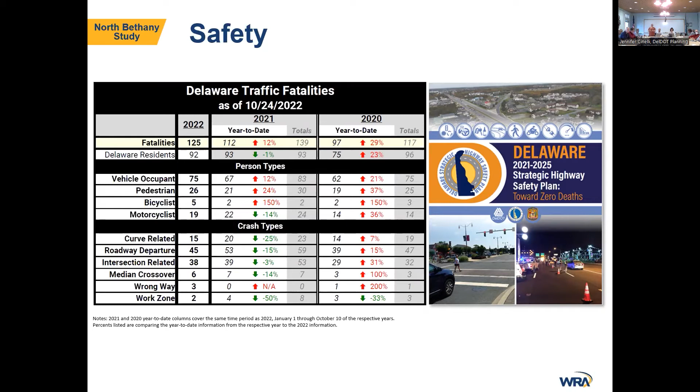I'm not sure if anybody is familiar with road diets, but it's basically shrinking the roadway down and making it more multimodal versus having it be kind of a high-speed highway.

So again, once we're through the data, we're going to talk about some strategies that we think are going to work, which will be short-term stuff we can do right away, mid-term stuff that's going to take probably about 5 to 8 years, and then the longer-term stuff is stuff that we put into our capital transportation program.

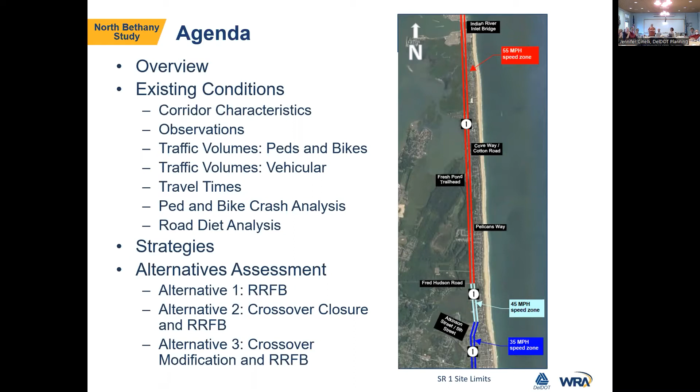And so this started, it really started before Rep. Gray requested it. He did get involved to get this study off the ground for sure. But it actually started with Mr. Seth Hammond reaching out to myself and Linda Osiecki, our pedestrian coordinator at DelDOT, during COVID.

When everyone kind of stayed home, but then decided they needed fresh air. And so there was more bikes and more peds and more everybody at the beach.

So for the past 2 years. Slow down a little bit. Okay, folks online are having a hard time hearing the audio, sorry.

So it's been about 2 years that we've been working with staff in assessing the area, trying to figure out where the focus of this study needed to be. But then I was able to get this part of the study funded.

And so this summer we had our consultant team go out and start the assessment, doing counts on the ground, which you'll be able to see the data for in just a few minutes.

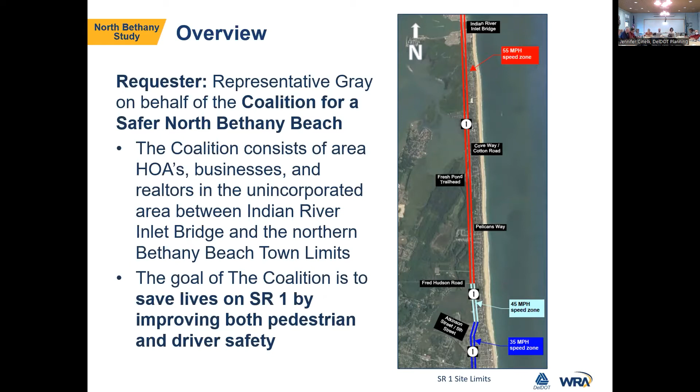Thank you, Jen. As Jen said, my name is Leah. I'm a planner with WRA. Kyle, he's the engineer and I'm the planner. So I'm kind of the big picture thinker and he's the data guy. We're excited to be here tonight and share what we learned.

So we did get out in the field, and one of our goals for this is obviously the way people walking and biking travel the corridor is much different in the peak season than the off season. Although we do understand that at this point there are people walking and biking throughout the year. Increasingly, more of you are living down here full time and still want to get out and move. So we met out at the end of July, and fortunately we were able to get some people on the ground and making some counts.

So at that kickoff meeting, we heard from Seth representing the coalition and a number of your local elected officials. Thank you for joining us. Some concerns: obviously, speeding along the corridor, the fact that we don't have any marked pedestrian crossings out there right now. Also, pulling out of some of the neighborhoods, people maybe are looking left for cars, but aren't looking right for people walking and biking. Some overgrown vegetation issues, not too much of that, and just general things that I'm sure you've all observed.

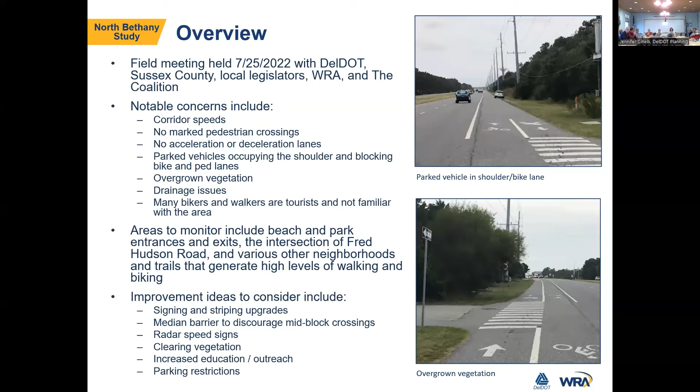So we collected feedback on where we should post up and count, and you'll hear more about that from Kyle momentarily. And we had some preliminary ideas to consider as we were out there making those observations, signing and striping upgrades, and some other techniques. So as far as questions go, we are going to get through the existing conditions and then pause for questions. And then we'll get into our strategies and some of our preliminary recommendations, and we'll pause again. So we'll be ready for you in a minute.

So the corridor we really ended up focusing on was Route 1, between the bridge you see right out the window, down to the town limits of Bethany Beach, so around 5th Street, Atkinson Street. So it's about a 4.4 mile stretch. As you know, 4 lanes, divided highway, and a unique treatment on the shoulders with the bike markings and pedestrian markings. And as I'm sure most of you know, bikes by law are required to travel with traffic, and pedestrians by law are required to travel into traffic, and that's for safety reasons and for expectations of users.

Now, I'm sure you all observe also, oftentimes people are not following those conventions because it's probably a little scarier to cross the street than it is to stay on the side, especially if your origins and destinations are on the same side. So that's one thing we're very aware of and is a concern. We also have a couple of bus stops out there right now, and if you get off the bus, you're kind of stuck on that side of the road and you have to cross. So when we look at crossing locations, we want to consider transit as well as all of our U-turn locations and private driveways.

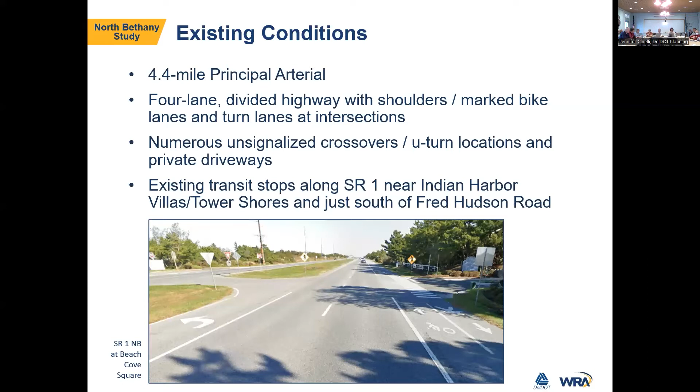So right now, the speed limit is posted 55 miles per hour north of Fred Hudson Road, and that decreases south of Fred Hudson to 45 miles per hour. The annual traffic volumes out there are a little north of 32,000 vehicles daily.

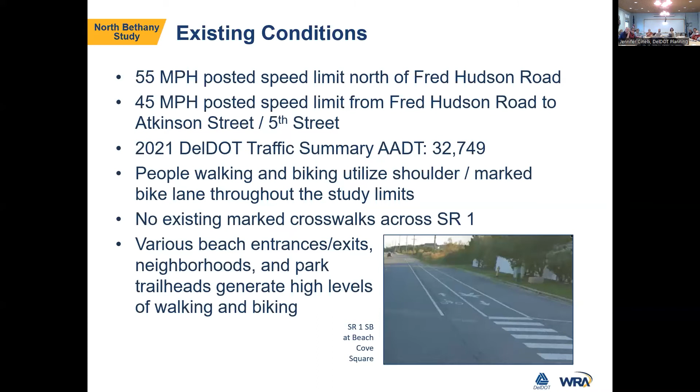And I think everything else we touched on already with the no marked crosswalks and all of that. And I'm going to turn it over to Kyle.

Thanks, Leah. So after we met in the field with Seth, we actually took a ride in the car and looked at hot spots along the corridor, areas of concern. So we identified 7 sites. We sent the team out the next weekend on Saturday, July 30th. You might not remember that day, but it was a high of 84, no humidity. It's like a perfect day.

I know Seth had brought up some concerns that there's potential that Saturdays aren't as busy because of turnover on rentals. But we did look at the trail volume. There's a traffic counter at the Fresh Pond Trailhead, and that showed really no difference between Saturday and Sunday volume. Sunday is slightly higher, but when we were out there, you'll see from the data, there's plenty of pedestrian and bicycle activity. We had to go out the following weekend too to grab the last site.

So we looked at longitudinal pedestrian and bicycle volumes, people using the shoulders of Route 1. We counted people crossing Route 1. At the Fresh Pond Trailhead, we did our own count of traffic in and out of that, and then just general observations while we were out there, anything to note, origin destinations, travel patterns, conflicts. I'm gonna get the slide there.

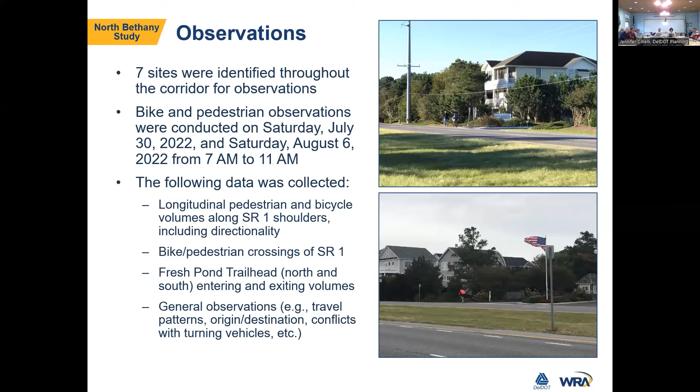So this is our longitudinal pedestrian bicyclist volumes. These are hourly volumes, the peak hour at each site. And so you can see here the sites that we chose. So for example, the 106 bikes at Cotton Road and Cove Way, that's a total of both directions, both shoulders of Route 1. But you guys can see just from the numbers, there's a serious number of bicyclists and pedestrians out here. Yeah, over 100 bikes an hour, 40 to 50 to 60.

Up at Cedell Drive, you have 82 pedestrians an hour. And one of the things we noticed was a lot of the pedestrians use the northbound shoulder, regardless of what direction they're walking, because it's shaded. I think it's just generally people want to be on that side.

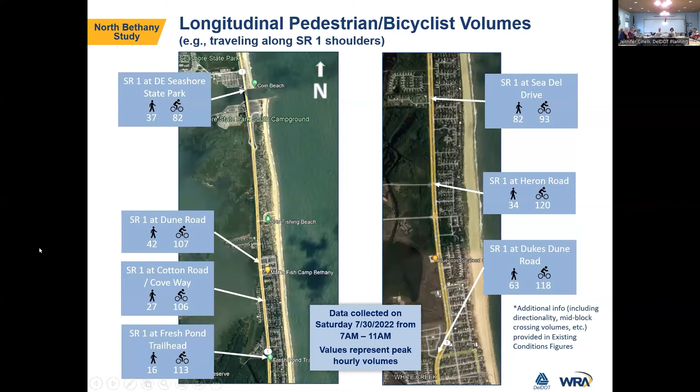And then we go to the crossing volumes, next slide. So these are pedestrians crossing Route 1. You can see it varies throughout the corridor, but at the Fresh Pond Trailhead, we had 51 people crossing in just a single hour. So the numbers are pretty staggering. Even throughout the rest of the corridor, you have 20, 21. So obviously there's people trying to get back and forth.

I know some of these communities have deeded access from one side of Route 1 to the other. So it was apparent, and the trailhead is clearly the highest volume, and that's going to be the place where we start, which you'll see where we're going to start with our improvements.

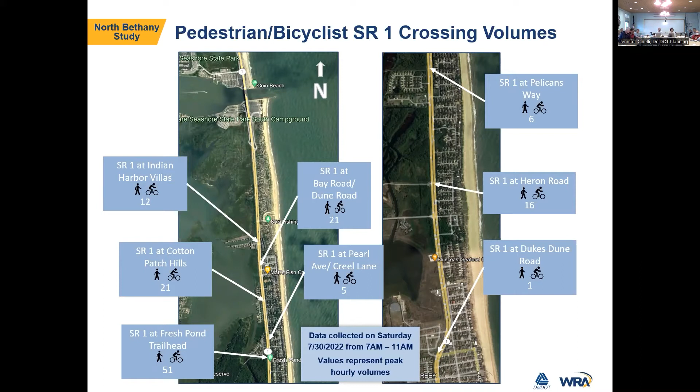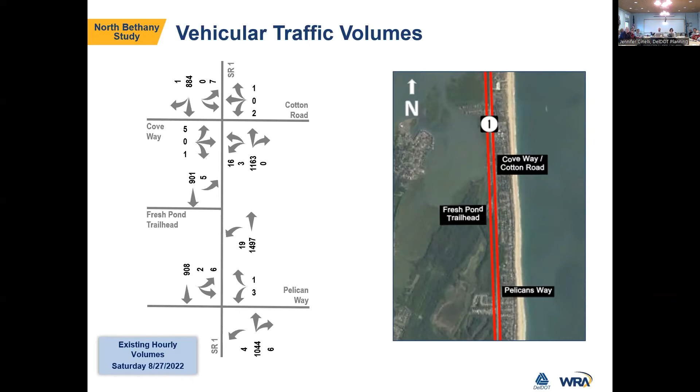And then we went out and collected some spot counts just to get an idea of what the turning movement volumes look like at some of these crossovers. So this is during Saturday, August 27th, middle of the day. So you can see hourly volumes northbound on Route 1, you got 1,200 up to 1,500 vehicles an hour. Southbound is a little under 900. But you can see the side street traffic and the U-turns, they're pretty negligible volumes there. That just gives you an idea of hourly summer volumes.

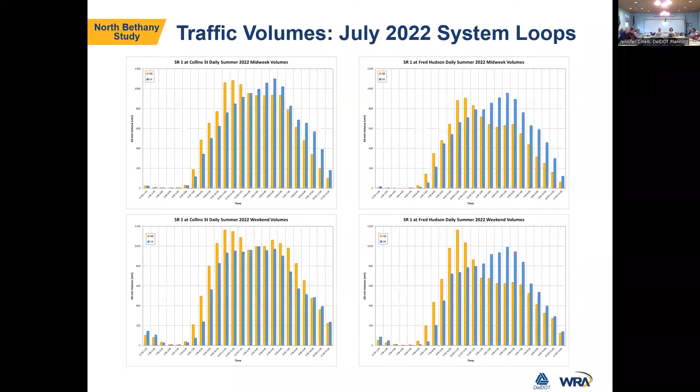And then you see the same trends at Fred Hudson Road. They're also around 800, 900 to 1,000 vehicles an hour in the peak direction, and that's directionally, so in each direction. And all this again is available online if you guys want to look. Yeah, when you get the PDF, you'll be able to get into the weeds and read the numbers. Yeah, zoom in a little more.

We also looked at travel times along the corridor. So we used April data to look at a typical AM and PM peak hour in the weekday. And then we looked at July Saturday data. So from Dewey to the Inlet Bridge, you can see during the week in April, it's about 5.5 minute travel times, and then tack about 2 more minutes on for the summer. Similarly, down below the bridge to Bethany, you're looking at 4 minutes roughly in the off season, and then add another minute to that. So that's really just due to the increased volumes.

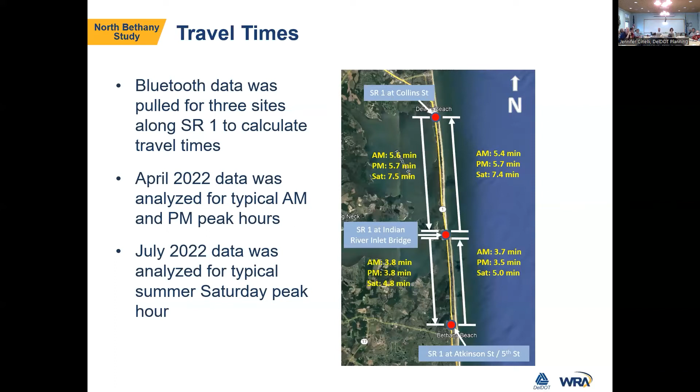Speed study: DelDOT traffic actually collected a speed study out here recently. We used portable tubes to collect speed data. You can see based on the results here, locations A, B, and C are where it's posted 55 miles an hour. Your average speeds were generally in that range, a little slower at site C when you're coming out of that 45 mile an hour zone north of Fred Hudson. 85th percentile speeds are nearly 10 miles over the speed limit.

And then site D, which is in that 45 mile an hour zone, or I'm sorry, that's actually south. That's in the 35 mile an hour zone in the town of Bethany. You can see it's a little better there, likely due to the enforcement that's pretty consistent there in Bethany.

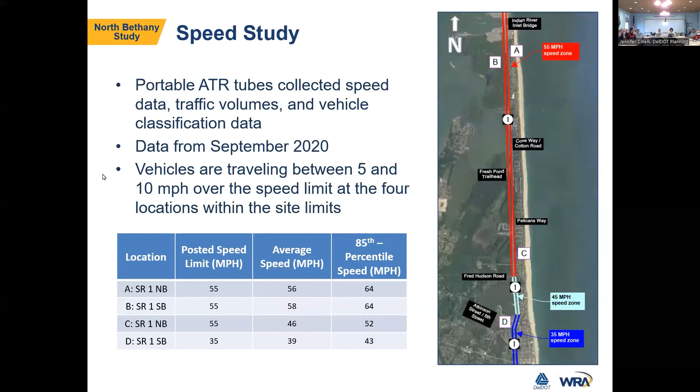And then we look at pedestrian and bicycle crash history. We only focused on ped and bike crashes, with that being the focus of the study. Over the 10-year period from August 2012 till this August, there were 12 total pedestrian and bicycle crashes, one of which was a fatality, unfortunately.

Looking at those 12 crashes, 6 of those involved vehicles turning out of the neighborhood westbound from the beach side, turning right, and they'd hit a bicyclist or a pedestrian coming the wrong way. Well, the pedestrian is going the right way. That was only one incident, but 5 incidents of the bicyclist coming the wrong way. You're pulling out of your driveway and you're just looking left for traffic, and you don't see that bicyclist coming. So that was the biggest trend we saw.

We had 3 crashes involving bicyclists on the shoulder that ran into a parked car. Seems kind of silly, but that's an actual concern, people parking or broken down vehicles sitting on that shoulder. There's nowhere to go if you're a bicyclist. And if you're in that predicament where, do I go in the travel lane or do I hit this car? You're probably just gonna hit the parked car. Take your chances there.

2 crashes involved vehicles entering the travel lane. They're northbound. One of them was by the trailhead, and that was one of the fatalities. Not sure the circumstances behind those. And then there was 1 crash involving a vehicle entering the right turn lane as a bicyclist going the same direction was in there. I'm sure you guys have seen that conflict. That's actually pretty common in Dewey. We found a lot of those type of crashes.

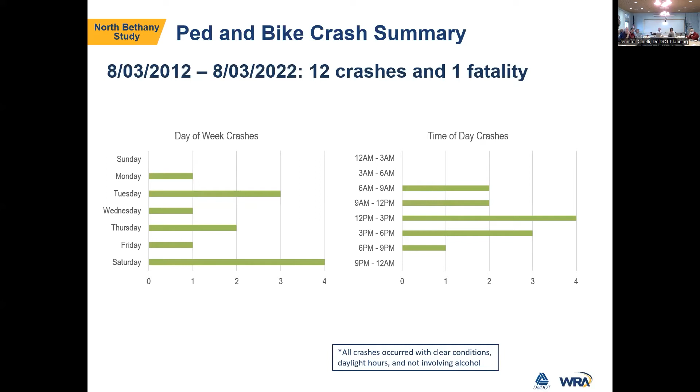Looking at day of week and time of day, you can see Saturday's our biggest day. Surprisingly, there were none on Sunday, but pretty well distributed throughout the week. And then time of day, all crashes occurred during daylight hours. 12 to 3 was our biggest cluster there, but it's not really a nighttime issue since people aren't really using the facilities at night. On to the next slide there, Leah.

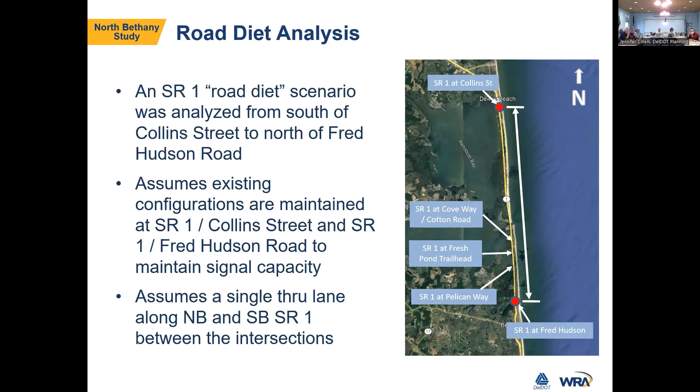But as you'll see, if you go to the next slide, Leah, we looked at what would happen if we did do that. The top is some of those 3 crossovers I showed you where we collected the turning movement volumes, and westbound coming out of your neighborhoods, you're looking at up to 1.5 minutes extra of delay. The U-turns aren't as affected, so it would obviously be an inconvenience for local residents trying to leave their homes. But the more telling data is below.

We ran highway capacity analysis on 2-lane roadways with no passing zones, and you see your time spent following another car is basically 100% of the time. You're never in a free flow situation. Your average travel speed's down around 35, 40 miles an hour, and your level of service, which is basically a scale, A being no delay and F being congestion, it would just be congested.

Not to mention the public backlash that DelDOT will get from doing such a thing. So we did our due diligence, but we're not recommending going down to 1 lane.

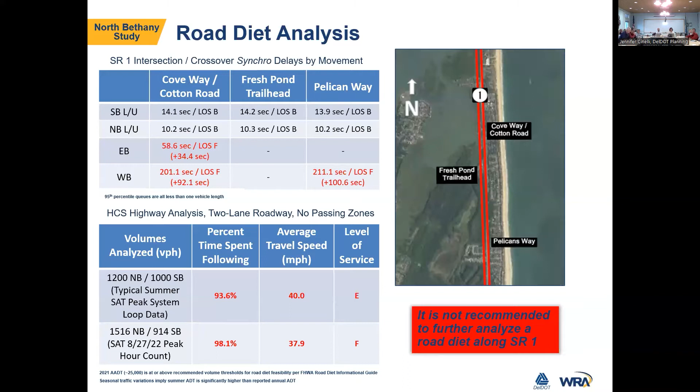They're not recommendations yet, let me say that. They are strategies right now, because we are here today to hear from you as to what we do want to advance and call a firm recommendation coming out of this effort.

So here we go. Firstly, with our strategies, when DelDOT does these studies, what we don't want is this document to go sit on a shelf somewhere and get dust on it, which I think we've all been familiar with. That's not what we want.

So pretty much everything coming out of this has to fit into one of three categories.

And those essentially are short, medium, and long range improvements. Short range improvements are usually within 1 to 3 years, sometimes right away, depending on how basic they are. Generally, those are improvements that can be handled by DelDOT's traffic group as part of paving or striping.

And also the bridge group, and they go into the DelDOT CTP, or Capital Transportation Program, but on the operations side of things.

Now, the CTP is also capital improvements, so those are bigger changes. And those bigger changes, as you all know, take more time and they take more money, and they have to go into the process. The 4 to 6 year horizon is probably when a project would start their design phase.

So that's not even barrels on the ground. We're talking just starting off with drawing and drafting kind of what the concepts are gonna look like.

And then long range, and that's where Jen, as a planner for Sussex County, is also in charge of keeping track of all the big picture, long-term recommendations of getting things done and making sure that stays on board.

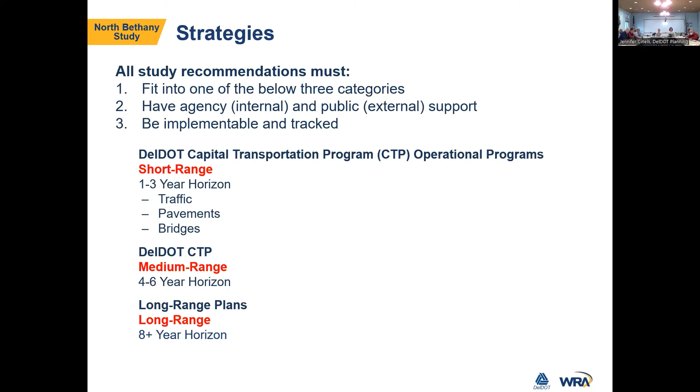So just wanted to kind of have that caveat, and we're gonna walk through which of our strategies fit into each of those categories. This is not gonna be an overnight solution, but we do have some ideas.

So some short range strategies we could do very quickly: we could standardize and improve signage at the exits to private residential developments. Again, most of those are not in DelDOT's control.

You see an example there on the screen of a 'look again for peds and bikes crossing' sign. So that's something we could coordinate potentially.

So I don't want everybody to think, oh, they're already giving us something to do as an HOA. Please understand, because you all have private developments with private roads, it is gonna be collaborative. We're gonna take care of the things we can take care of on Route 1.

You'll have to take care of some of the things along your roadsides, and working with our legislators and councilmen to maybe get some assistance with that. And we're here as a resource always. So please don't feel like we're pushing everything off to anybody. It's gonna continue to be a collaborative experience.

Thank you, Jen. And the other really quick and easy thing is evaluating sight distance. So if you're coming out of a development and you have to pull forward into the shoulder to see both ways, that's a problem, right?

If you have to pull into the shoulder to tell if a bike's coming, we're already at a conflict point. So we look to all of you if there are any places where there's overgrown trees or vegetation.

Depending again on where that's located, if it's within DelDOT's right of way, the DelDOT crews can handle it. If it's on private property, it might be working with your HOA to make sure that's trimmed back. So those are some things we could tackle immediately.

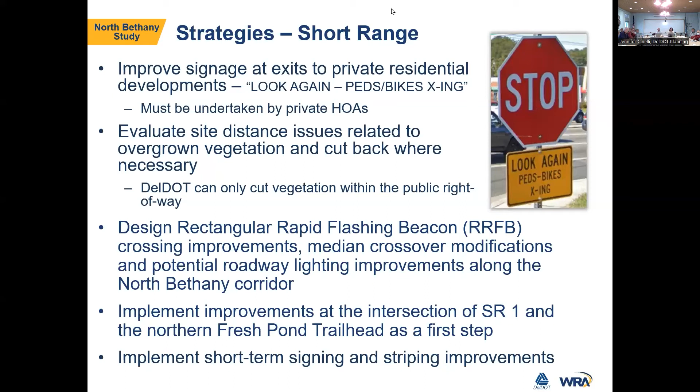That's very helpful, and again, we'll be getting into more slides of what these crossings would actually look like, so bear with us for some more greater level of detail there.

So here's an example of an RRFB - this one's at Wellington Parkway in Bethany Beach. Here's an example of where right now people often are crossing, where there's an existing place you can do a U-turn, through a median. There's a bunch of different configurations we'll show momentarily, but in case anyone had any question about what these RRFB things are - for some reason us transportation professionals love our acronyms. What I like to point out too is the refuge area that exists now for pedestrians and bikes, because sometimes when you're sitting inside a crossover that's paved for vehicles, that's very stress inducing. So this calms it down a little bit, makes you stop and pause and make sure it's safe to cross once the beacons start going off.

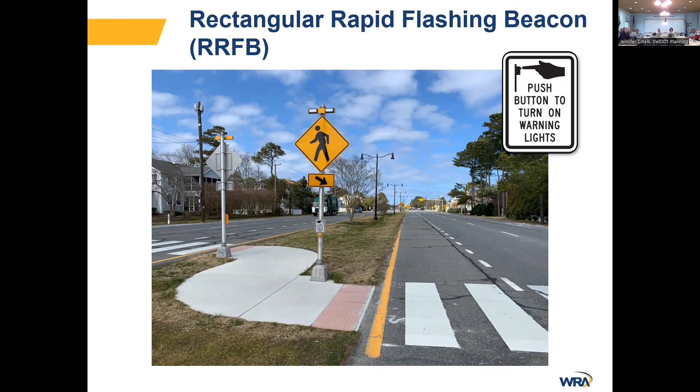So medium range, we have already talked to the DelDOT paving group, and right now this segment of road is not on their schedule.

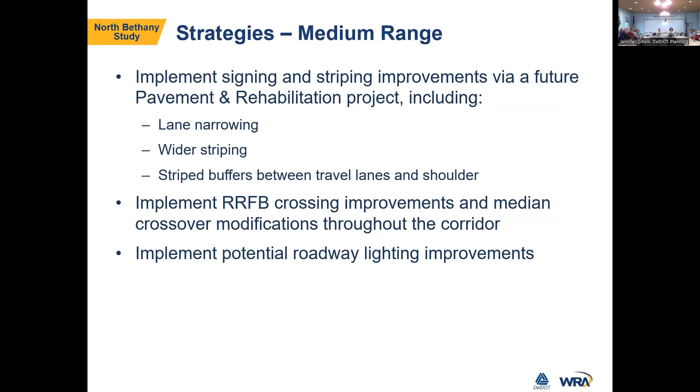They usually do a schedule like 2 to 3 years out, but there's interest in maybe moving that forward. One thing that could be done is narrowing the lanes down. Right now, the actual travel lanes cars are moving on are 12 feet wide, and increasingly throughout the state we're narrowing to 11 feet wide, incorporating wider striping. We could also stripe a buffer area between the edge of the vehicle lane and the shoulder, and in conjunction with pavement rehab we could implement those crossing improvements Kyle was just discussing, as well as lighting improvements.

This is what's out there right now. We have a pretty wide grass median, 34 feet for those who can't quite see the screen, with 12-foot wide lanes and an 11-foot shoulder. Even if we just taper all those lanes down to 11 feet, we gain enough space to stripe a nice wide 3-foot barrier between the edge of the drive lane and where people are walking and biking, without losing any width for the people walking and biking. So you still have 10 full feet.

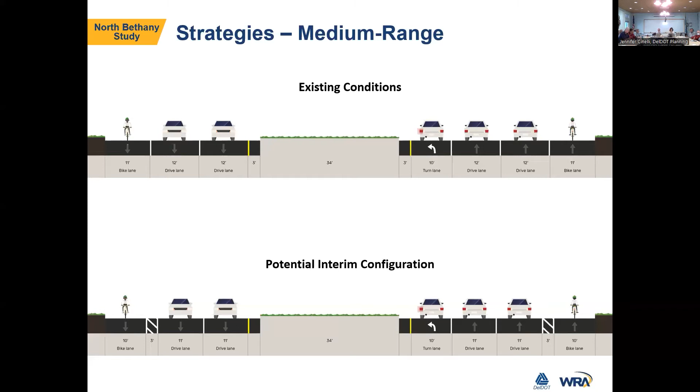This is kind of an interim configuration we could look at that would give you a little more space. Again, no physical barrier between where you're walking and biking and the cars, but a little bit more space. Those narrower lanes could also slow cars down a little bit in conjunction with the crossing improvements. When we look at measures that start causing people to slow down, it's things at the edge of the roadway. More vegetation in the median is another strategy we talked about. Up here on the north side of the bridge, it's kind of like a wildflower meadow in the median, and once you get south of the bridge, it's just close cut grass. That can also help slow people down, to have some more interest going on there. So that's a potential interim improvement.

Looking at long range, we have another section you can look at momentarily. Just want to note, any of these improvements have to be coordinated with Sussex County. In other parts of the state, they have planning organizations that help this process, but in Sussex we have Jen. The county does have to be on board in order to recommend a project to go into that capital transportation program. So they are abreast of this, they've been kept up to date on what we're up to, and we'll be seeing this presentation.

Any bigger improvements are of course going to have to look at stormwater management. We know there's flooding issues down here. DelDOT has a new resiliency section, and we're going to want to make sure we're working hand in hand with them.

Another thing we've talked about, if you've traveled Route 1 further north, you've noticed those cable median barriers that are going in. That is because, unfortunately, the safety data Jen presented earlier shows we're seeing a lot of cars crossing over grassy medians and having head-on collisions. That is happening, and it's something we're very concerned about statewide. Do those median barriers look very pretty? No, they do not. But were we to do a median barrier with some wild native plantings to mask it, that could potentially both be a safety measure and an aesthetic improvement. We're excited to hear from you on that.

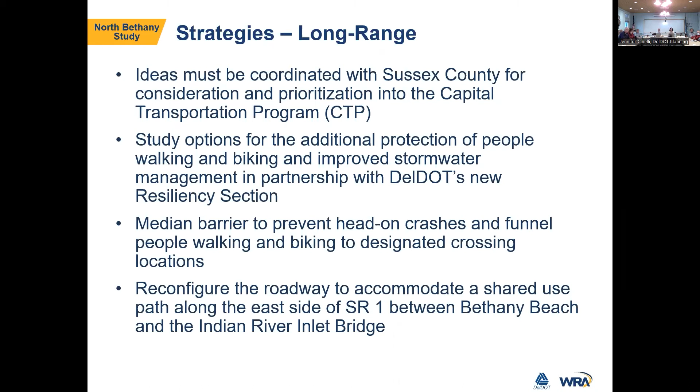And the most exciting, in my humble opinion, is potentially reconfiguring that roadway to accommodate a truly separate shared use path along the east side of Route 1 between Bethany and Indian River Inlet Bridge. Fortunately, the right of way is so wide. If you look at the screen again, there's our existing conditions. If we make our grassy median a little bit more narrow and shift our lanes over, we'd have plenty of room for a nice wide 14-foot path—generally we go with 10 feet for a shared use path, but increasingly in coastal communities these facilities are very popular and 10 feet is not wide enough when it's crowded. So looking at a nice wide 14-foot pathway for people walking and biking, that would still retain shoulders for avid cyclists who like going a little faster—you'd still have your shoulders to ride.

But if you're out with your family or some people who just want to take a leisurely ride, you could have that option. Now that's just an example. And again, any of these improvements would have to coordinate with stormwater management because we're increasing the impervious surface, so drainage might be more of an issue, and this is a long-term goal.

These things are not cheap. They require a lot of planning and a lot of design. But given the volumes of people walking and biking out here, we definitely think it would be well used. So again, this is something that will be talked about with the county and then eventually submitted for a CTP project. The study for that type of configuration would be much larger than what we've done so far. So I have some more details on the crossings and then we can open it up for questions.

So I'm going to turn it back over to... Oh, and any of the longer range projects are also going to be out for public workshops multiple times before anything is ever done. So I don't want anybody to think this is the first time you're going to see it and then boom, it's coming into any plan. That's not how it works. We are required, and I love doing public workshops. So trust me, you will see me many, many times before any of the major projects come online.

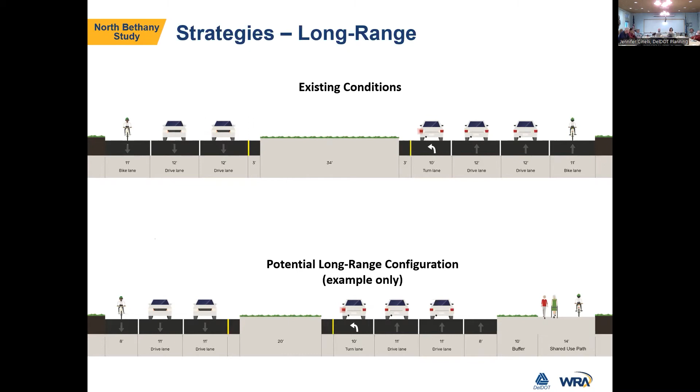So I'm going to turn it back over to Kyle, who's going to share some detail on what those crossings could look like, and then we'll break for questions and comments.

Yep. So we looked again at the Fresh Pond trailhead since that was the highest concentration of pedestrian crossings. But this is a typical application that we could apply throughout the corridor. And I'm going to share a few alternatives just so you guys can see our thought process and what we've been thinking about.

So alternative one here is just maintaining existing conditions and putting in RRFBs, and you can see the yellow is new concrete there, so you'd have a new refuge area in the median. The benefit is obviously with the RRFB, you press the button, it flashes, it's conspicuous. People know there's pedestrians in the area.

We also have a few new sites where we've just installed advanced flashers. So you press that button, it's going to flash, but then also a quarter mile up the road, there could be a flashing RRFB saying pedestrians ahead. We've also installed an overhead mast arm. I imagine maybe we go that route on Route 1 given the volumes, but you can mount the sign and the flashers overhead and ground mount. So we do have some different techniques we can use.

So this is alternative one, essentially keeping everything existing and then just putting the crosswalk and the flashers in. You can see the pedestrian crossing distances, that's just what's out there today. Crossing southbound, since you have that extra turn lane there, it's about 48 feet, and then 38 feet on the northbound side.

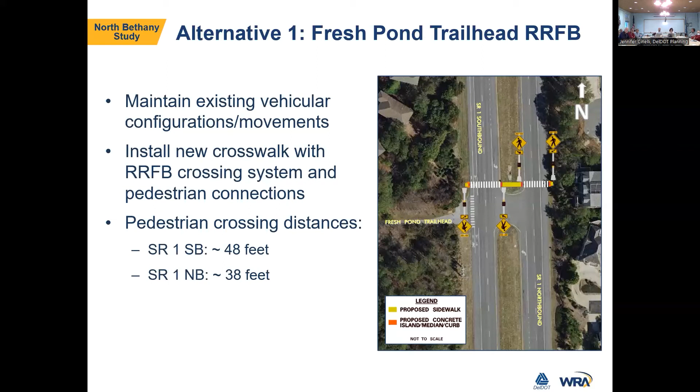Alternative two, we would be looking at just closing the crossover completely and then putting the RRFB in. This is beneficial for pedestrians, it's less confusing with the additional turning movements and U-turns of the cars. When we were out there at the trailhead, you could see when the pedestrians were in the median, in the crossover area, and then you'd have cars coming in the turn lane. It's just more conflict and more things to deal with. This makes it like a true mid-block crossing where, as a pedestrian, you're only dealing with 2 lanes of traffic in each direction. You don't have to worry about turns.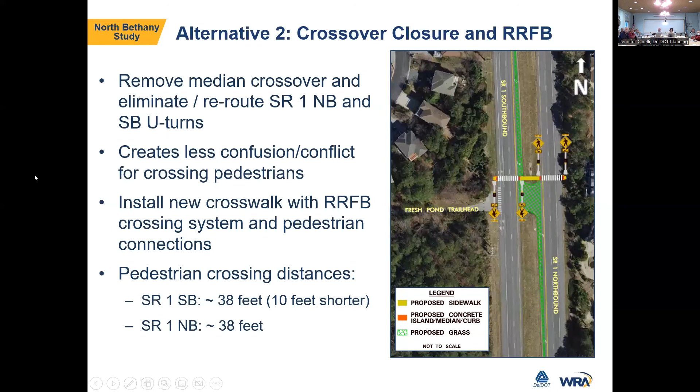So if I could just interject real quick, so Cave Neck Road, for those of you that are familiar with some of the corridors further north, because of the 5-point study, I've been a part of some of the discussions. We ended up closing the crossover that was directly out of Cave Neck Road. And in doing so, we forced all of the traffic coming off that road onto Route 1 to drive down and make a U-turn. And honestly, what we saw was so much improvement in conflict points. Crashes were next to nothing after we did that.

So while this looks a little unusual and maybe like it'll take more time for you all, it is actually a safer movement. What we saw at the Fresh Pond Trailhead, cars were not even utilizing the crossover correctly, let alone yielding to pedestrians and bikes within the crosswalk. And we actually had a question about what is the proper way to make a U-turn, because I think people are not aware. So Kyle, do you want to describe that for folks?

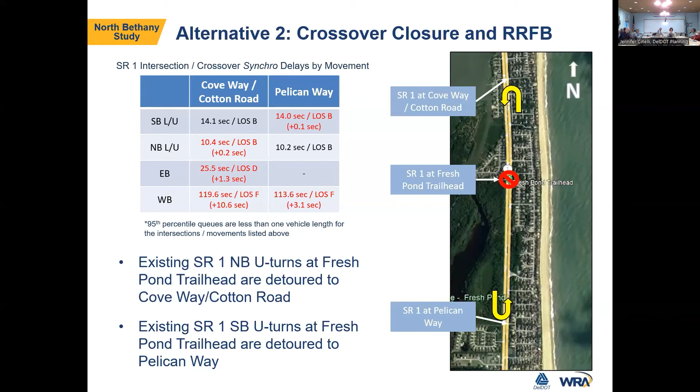Yeah, that's actually another one of the short-term sign and striping improvements, is adding some striping to the crossovers. So when you're approaching one of those, you're supposed to go all the way to the far end, because when you're making the U-turn, you want to be able to see that oncoming traffic. If you were to turn at the near side, if there's an opposing left turn or U-turner, they'll be blocking your view. So I know it's hard for those not online, but you want to go to the far end and turn. So yeah, the crossover striping, that's another short-term improvement we can implement.

And the goal is, with all these RRFBs, it's gonna feel more like that Middlesex Bethany area, and it's gonna naturally promote slower speeds. And with the striping improvements too, if we're able to get a pave and rehab, get the buffers in, narrow the lanes, we're hoping that all of this will naturally lead to slower speeds. I know we haven't mentioned lowering the speed limit, and that's just not something that DelDOT's really willing to do at this time, mainly because of the extreme public opposition to lowering the speed limit.